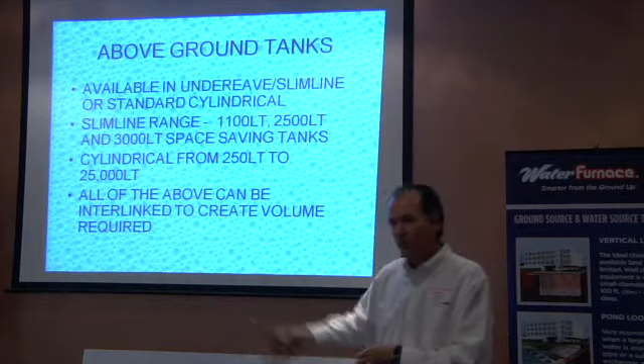Fit under the windowsill, so we call it an undersill tank. So you interlink a couple of 1100s or 3 1100s and you end up with 3,300 litres, etc.

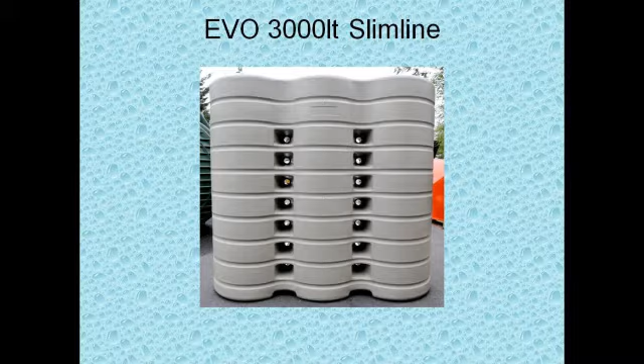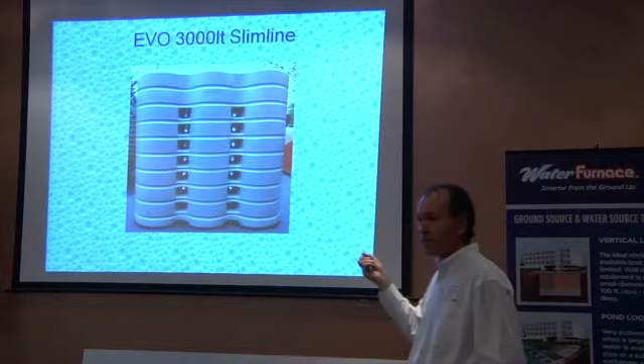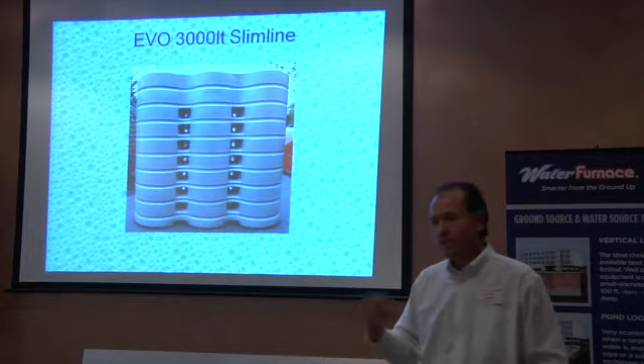Okay, that is the 3,000 litre slimline tank, and that section there is this section here. Okay, so you can imagine the strength that is in that slimline tank. It's only 840 millimeters wide, 2.3 meters long, and 2.1 meters tall. Okay, so it goes down the side of the house. You can again interlink them, etc. But that's basically the most popular slimline tank that we make at this particular time, using that patented technology.

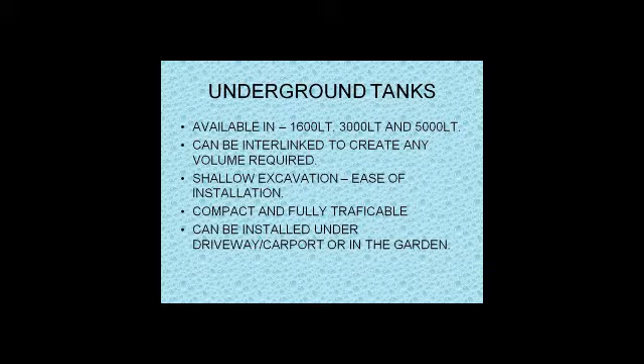This leads us into the underground tanks, available in a 1,600 litre, a 3,000 litre, and a 5,000 litre. Again, you can interlink them, so you can have whatever volume you want. Now bear in mind that these tanks, the ingenuity about them is the shallow excavation, the compact size of them. So there's very, very little excavation, and totally stable and fully trafficable. All right, so you can drive over them.

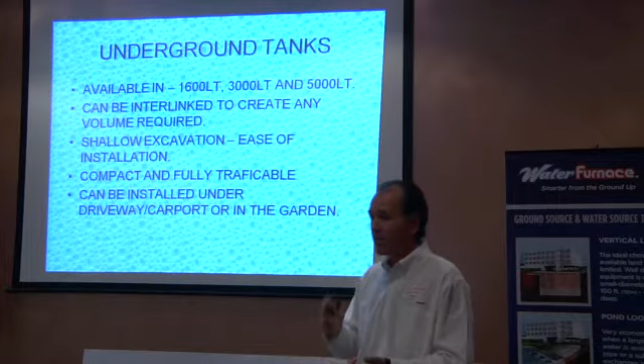So you can put them in a driveway, you can put them on a carport. Again, you don't have the angle of repose problem, so even if the carport's already built, but you haven't thrown your slab down yet, you can still get in there, dig the hole, and put in a 5,000 litre tank without a problem.

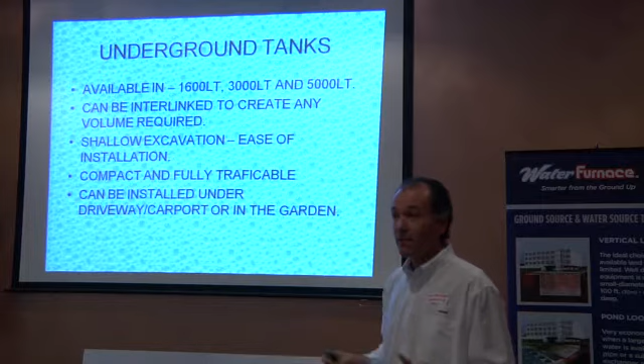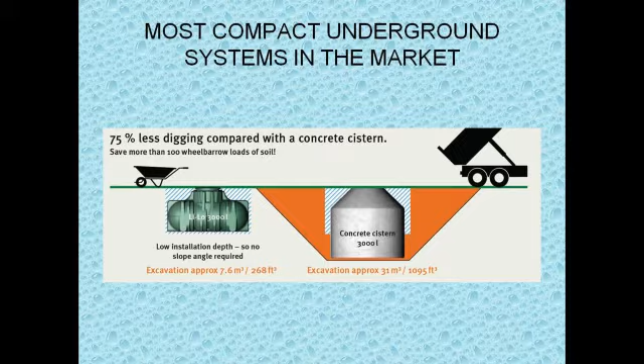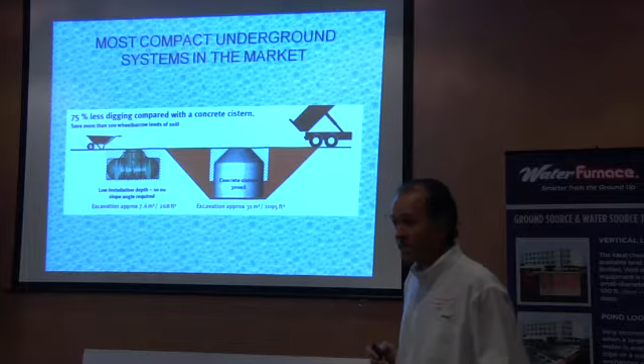Okay, this is just an example of comparing our 3,000 litre tank with a common or garden concrete 3,000 litre or another poly type 3,000 litre tank. We don't have to have the angle of repose issues because our excavation depth is less than 1.5, so we fly under the radar as far as all the legislation is concerned about digging holes.

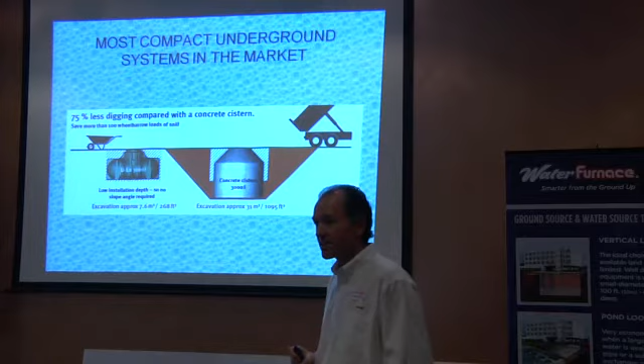You can see that you're going to have to excavate about 31 cubic meters to get a 3,000 litre standard type underground tank, whereas ours you're only going to have to excavate 7.6 meters. Okay? So it's a massive saving, not only in space, but in your actual job of excavating and getting the product into the ground. It's a very, very simple installation.

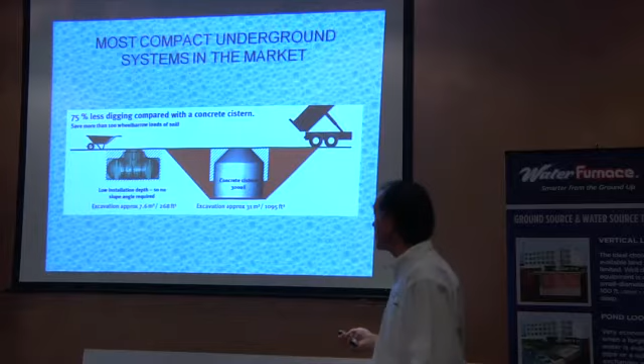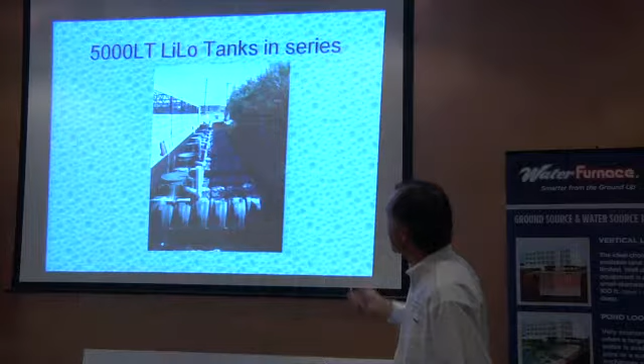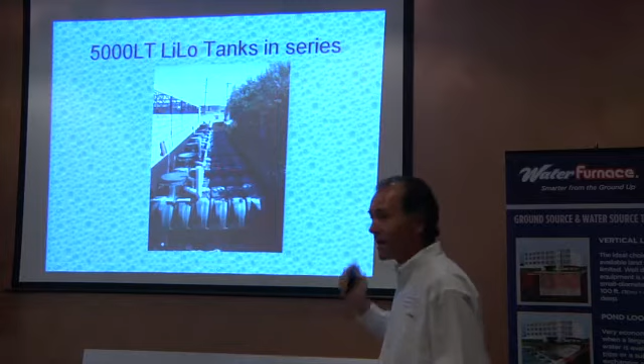This is an installation in North Fremantle. You can see that there's a boundary wall, there's a row of trees, and there's the structure or dwelling or whatever it might be. We've interlinked seven tanks in a row, and you can look at the space, how compact the space can be, and how many tanks you can actually put in there. That is not in a trafficable area, so we just have a standard pedestrian manhole which takes a 150 kilo point load.

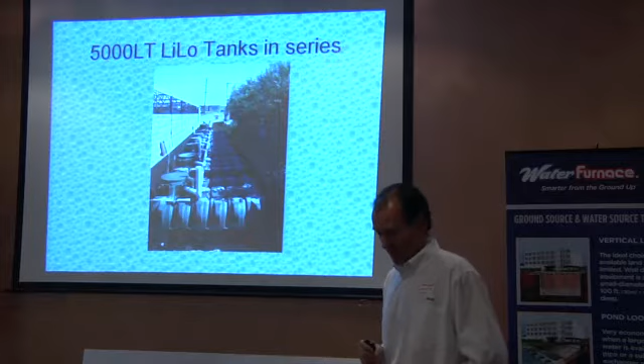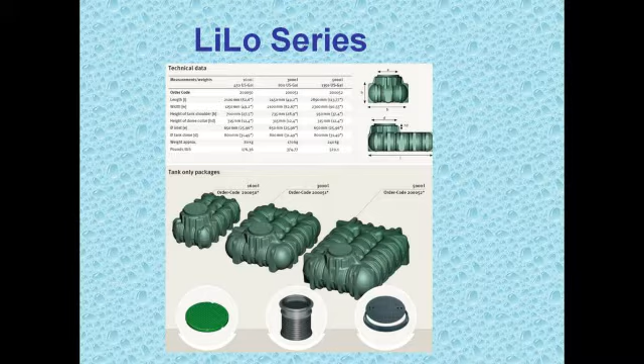They're the different sizes, the 1,600, the 3,000 and the 5,000. You'll see that the 5,000 is only about 2.89 meters long by 2.3 meters wide, and you can see the tank height is only 950, but once you've put the riser and the lid on, you're way below 1.5 meters.

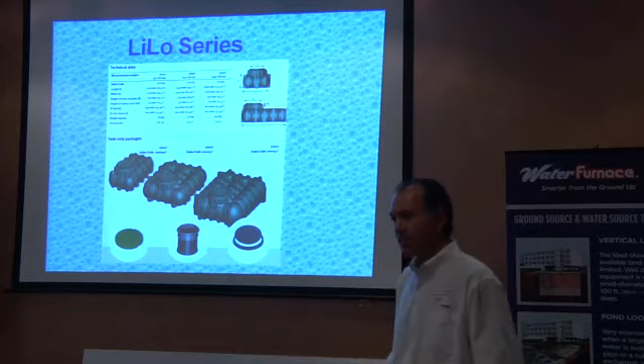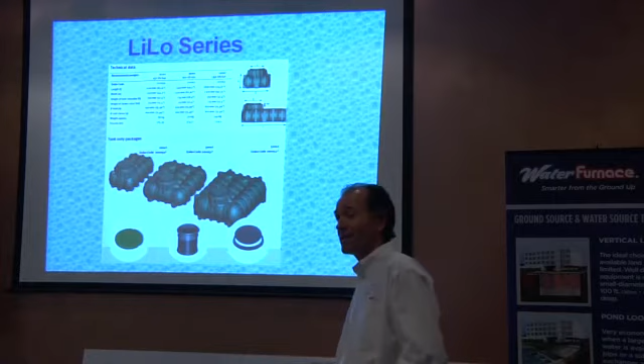Okay? In a fully trafficable area, we recommend that we have about 600 millimeters of earth covering over the tank, including the slab, which obviously spreads the load even more, which then at 1.5 meters makes it fully trafficable up to 3.5 ton axle load, which is like an 8-ton truck.

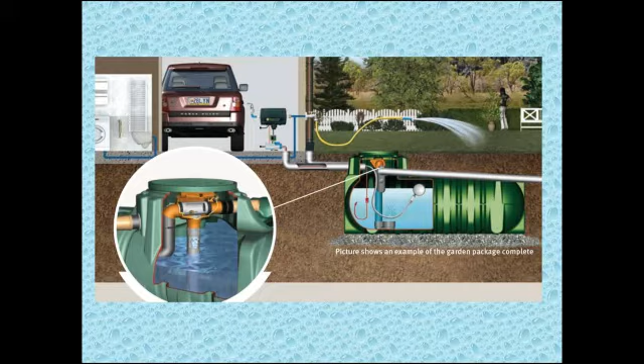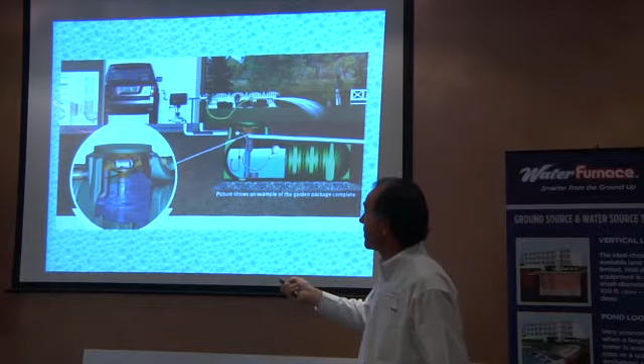This just shows you a typical application with downpipe feeding the tank, and then obviously rainwater going back through a type of controller back into general cleaning, toilet and laundry. So there's the blue Rehau pipe that goes back in there to the toilets and laundry. Again, rainwater in the tank, you'll be using rainwater in your utilities. No rainwater in the tank, you switch automatically back to mains through your controller.

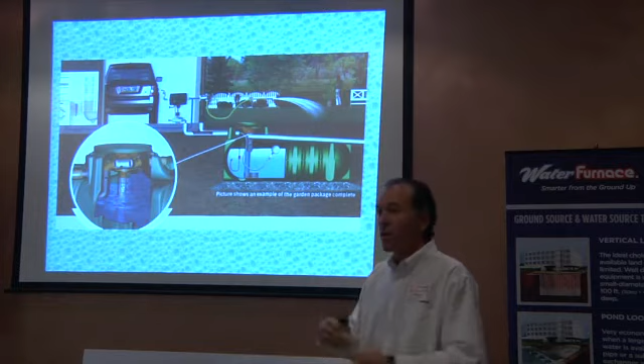Very simple, seamless system. Quite important though in these systems to ensure that you have good clean water coming back into your tank, because the last thing you want is your toilets leaking, dirt on the seals, or your pump having a problem actually pumping dirty water. So our Supra filter system, which was developed and patented again in Germany this time, and we just bring those straight in from Germany.

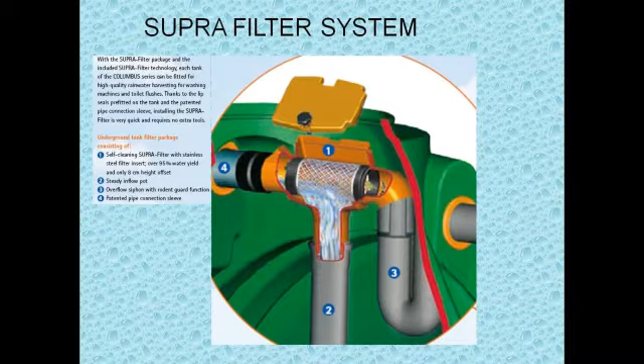Quite a clever contraption. I'll start with this little section here. First of all, the tanks are fully accessible, so you can actually get into the tank should you ever have to decontaminate or repair or service it or get the pump out or whatever the case is. It's one of the things that will be covered in the new underground tank standard, which will give some other underground tanks a bit of a challenge.

The beauty about this system though, that's just like a quick release Velcro type strap. So you just release the Velcro and then lift this pump system out, that siphon elbow stays behind. So in other words, you remove this whole thing out through the manhole, and then you've got full access. So there's no tools, there's no thread tape, there's no hacksaws, there's no glue, there's nothing. When you want to reassemble it, you simply drop the filter back in place, butt join there with the Velcro strap, and you're back in business.

This is a 0.35mm stainless steel mesh filter. Now it's a very, very fine filter, but the beauty about it is that it's got a 95% yield of flow, which means 95% of the water coming into the tank will actually drop into the tank. All right? The other 5% will keep pushing whatever debris might be on the edge of the filter down into the stormwater where it was going to go in the first place.

Okay? Even more clever, once the tank is full and it's sitting at this level, the full flow of the rainwater flushes the filter and cleans the filter. So it's a self-cleaning filter. You do have access, however, to obviously check it every 3 months or whatever the case may be, but it's generally self-cleaning, and again a very fine filter with a high yield. Again, that filter can handle 350 square meters of roof. All right? So you have no problem as far as the capacity is concerned.

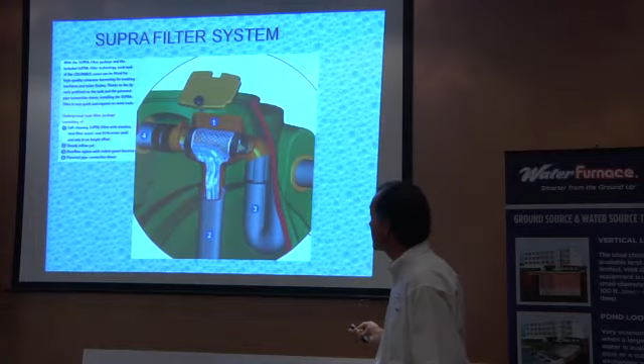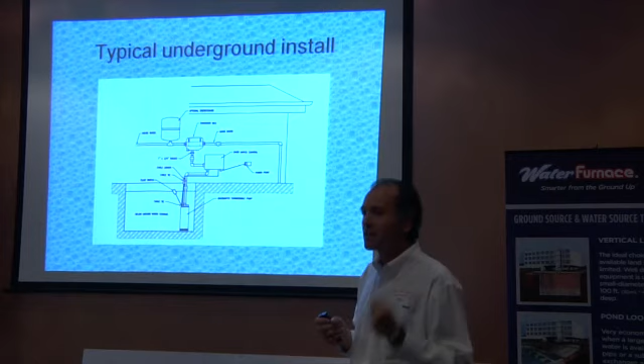This is a typical application of an underground system where you have a submersible pump in the tank, you have your controller and an optional pressure vessel, which we recommend, which basically gives your pump a soft start. It also, if you have a slight leak somewhere or a dripping tap or whatever, it stops the pump from hunting, switching on and off. So it is an energy saver at the same time.

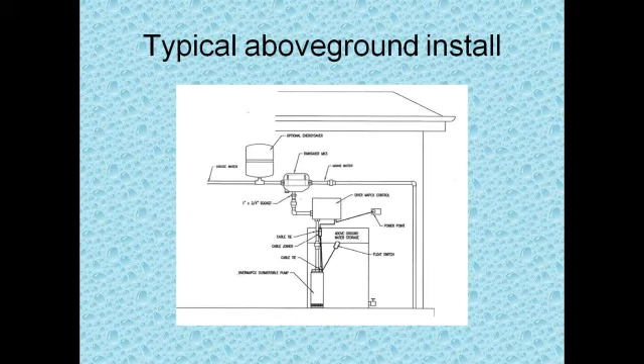Again, typical application for above ground, same system, submersible pump. It's out of sight. You don't hear it. It's just the most sophisticated way of doing it. We still have a problem with this